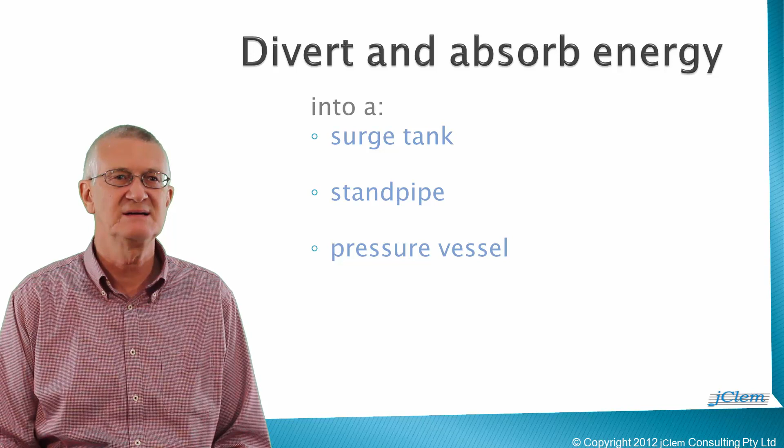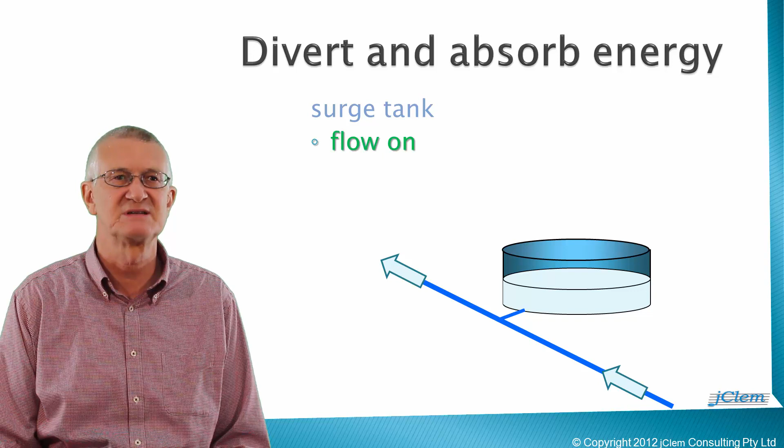pressure vessel. How does energy diversion work when using a surge tank? While the system is carrying flow, fluid level in the surge tank floats up and down depending on the hydraulic level in the pipe system. Somewhere downstream of the surge tank, a valve will close or a pump will stop. When that happens, the flow is diverted and stored temporarily in the surge tank.

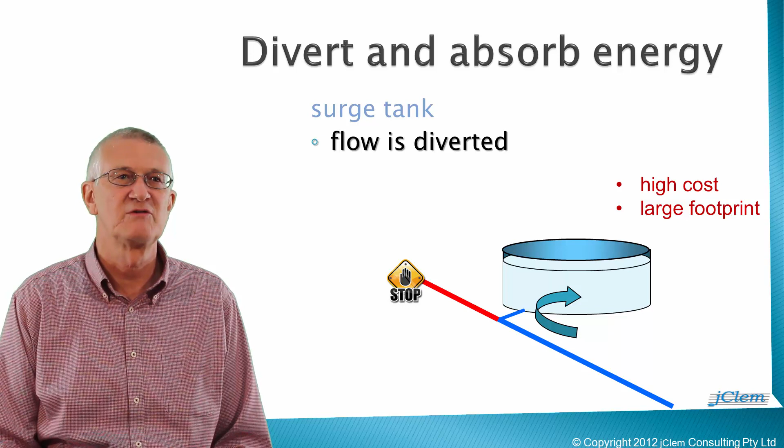Diverting flow into a low-height surge tank is often not practicable. For this solution to work, all the normal operating hydraulic grade lines throughout the life of the system need to fall within the height of the tank. During transient events, the system may need to provide overflow from the surge tank. Storage tanks tend to have a high capital cost, plus a relatively large footprint involving land requirements and visual social impacts.

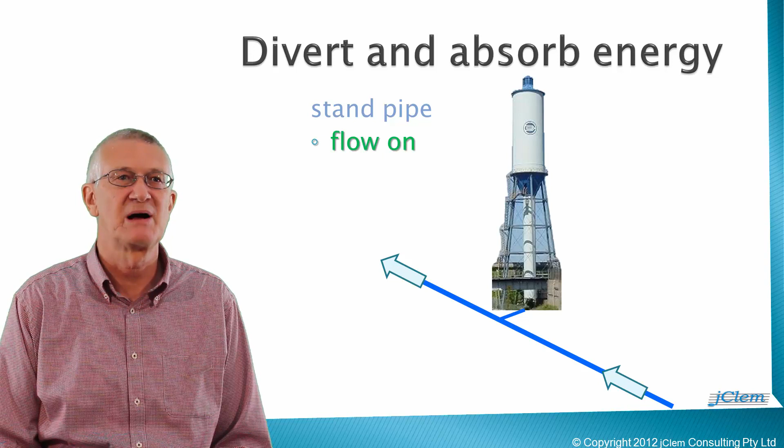Using standpipes as an alternative overcomes some of the problems found with surge tanks. How does energy diversion work when using a standpipe? While the system is carrying flow, fluid level in the standpipe floats up and down depending on the hydraulic level in the pipe system. Somewhere downstream, flow stops. Flow is diverted into the vertical standpipe and, if necessary, stored temporarily in a large component of the standpipe.

Diverting the flow into a small diameter standpipe can be more suitable for a few reasons. A standpipe can make use of the friction in small diameter piping to attenuate the surge, enlarge the structure towards the top to contain the fluid without overflow, economically build the structure to a greater height so that all normal operating hydraulic grade lines and surges are within the height of the standpipe. Some standpipes may still have to be designed to allow for overflow during transient events.

Unless a standpipe can be as simple as a self-supporting piece of vertical pipe, more complicated standpipes can have a high capital cost. One very significant disadvantage of standpipes is that they are not pleasing to the eye, so the public tends to say, "Not in my backyard, thank you."

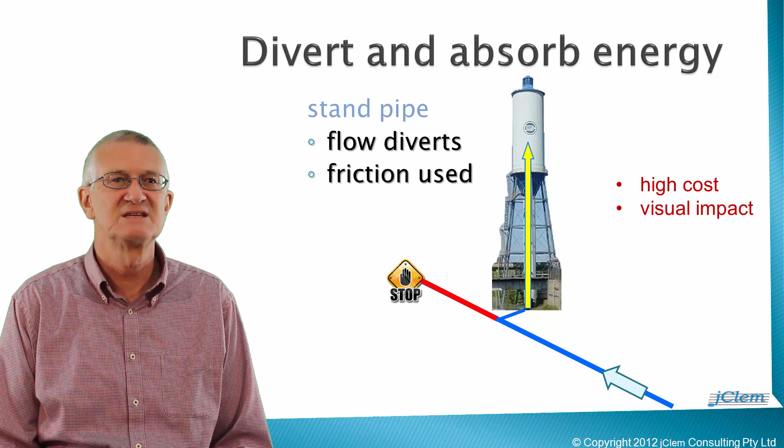The disadvantage of structures open to atmosphere, surge tanks and standpipes, has led to the popularity of closed, compressed air or nitrogen vessels. Pressure vessels are able to absorb kinetic energy in a compact, low-height format. How does energy diversion work when using a pressure vessel? While the system is carrying flow, fluid level plus gas volume in the pressure vessel adjusts to match the hydraulic level in the pipe system.

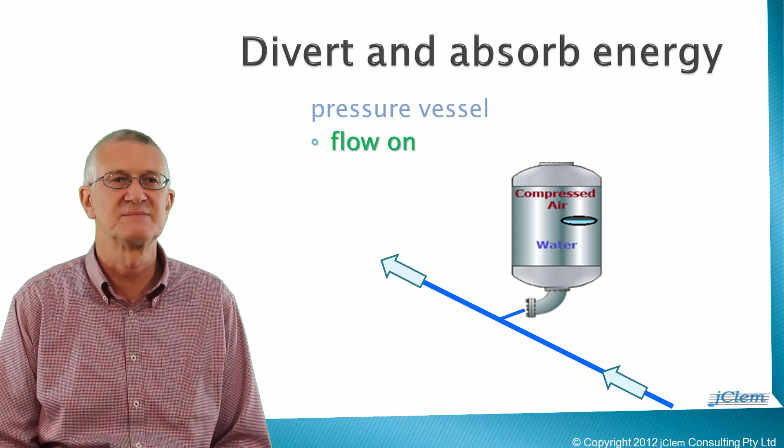Somewhere downstream, flow stops. Flow is diverted into the pressure vessel, gas volume decreases, and pressure of the gas volume increases. A significant proportion of the kinetic energy from the fluid is converted to energy stored in the compressed gas. In addition, flow rates out of the vessel into the pipeline can be throttled to constrain the rate at which energy stored in the compressed gas can be sent back into the pipeline.

A closed pressure vessel can't overflow. They can empty and discharge gas into the pipeline if vessel fluid capacity is too small. Despite this, relatively inexpensive pressure vessels can be designed with compact modular layouts. These advantages have led to them becoming widely used to the point where pressure vessels of various sizes and pressure ratings are commercially available as commodity items.

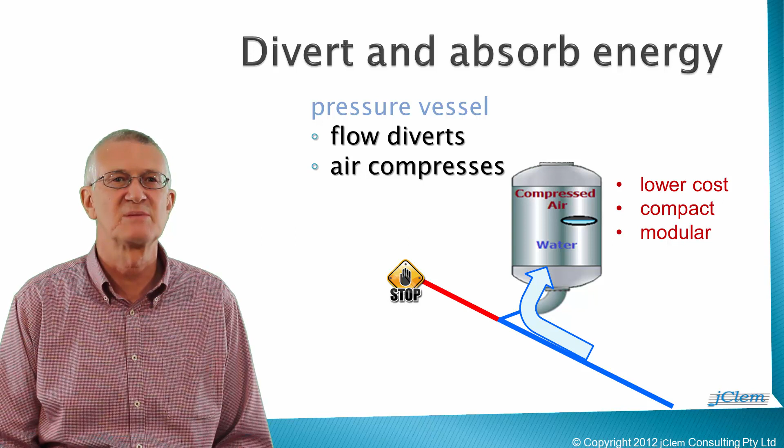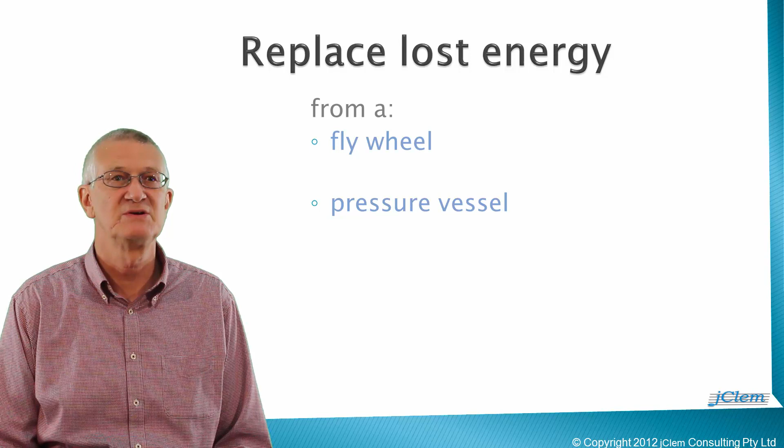For the delivery side of a pump station, we can replace energy lost when the pump motor stops by using either a pressure vessel or a flywheel. Flywheels, once brought up to the pump's normal speed, become a source of stored kinetic energy. When the motor stops for a period of time, the flywheel returns its kinetic energy into the fluid stream by keeping the pump turning.

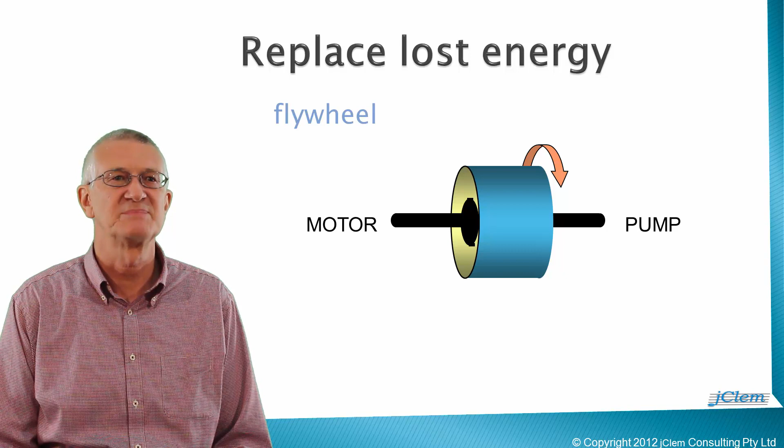Flywheels, however, create a number of problems, such as increased loads on the electrical pump starting equipment, increased mechanical bearing loads and pump maintenance, and occupational safety risks. Yes, you can put safety guards around a flywheel, but they can make that big red emergency stop button useless if they keep rotating for another 2 minutes, regardless of who and what has suffered an accident.

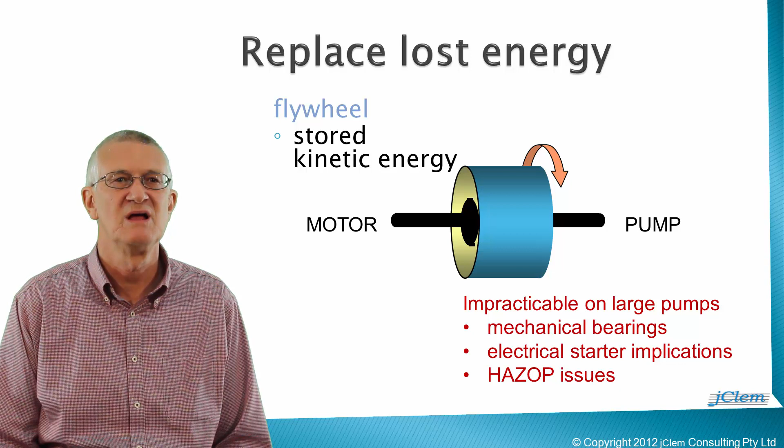Often at high rotating speeds, you can't design a flywheel with a big enough diameter without exceeding the safe rim velocity. Nobody wants pieces of disintegrated metal flying around a pump station. Providing the required moment of rotating inertia by making a flywheel longer increases the overall size and cost of the pump station. Consequently, flywheels tend to only be feasible on very small pumping installations.

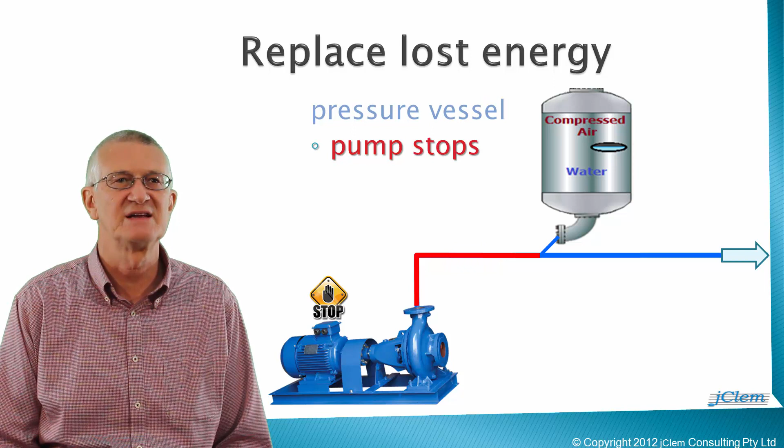As a result, compressed air or nitrogen pressure vessels have become widely used as a source of stored energy on the delivery side of pump stations, for all the same reasons of modular compact format and cost that make them popular when required to divert and absorb energy on a pump station suction main.

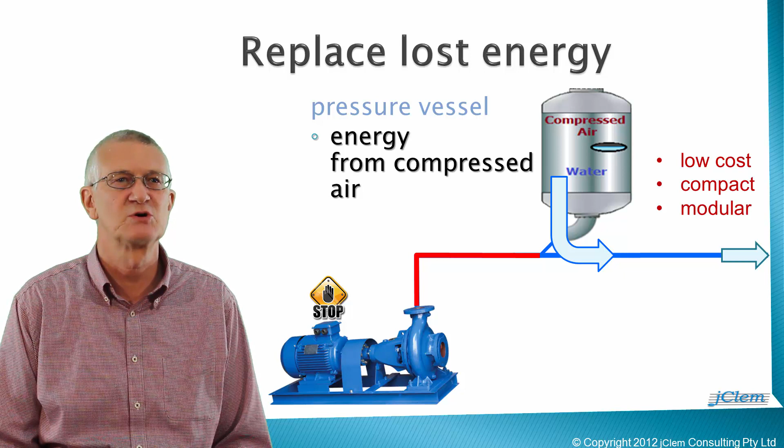What design choice can be used to directly reduce the size or rate of velocity change in a system? Start by selecting appropriate pipe diameters. Undersized pipes operating at high velocity dictate the magnitude of velocity change when a pump stops or valve closes. As the system grows, economics tend to favour increasing the system's flow rates. Consequently, the magnitude of velocity change tends to increase over time.

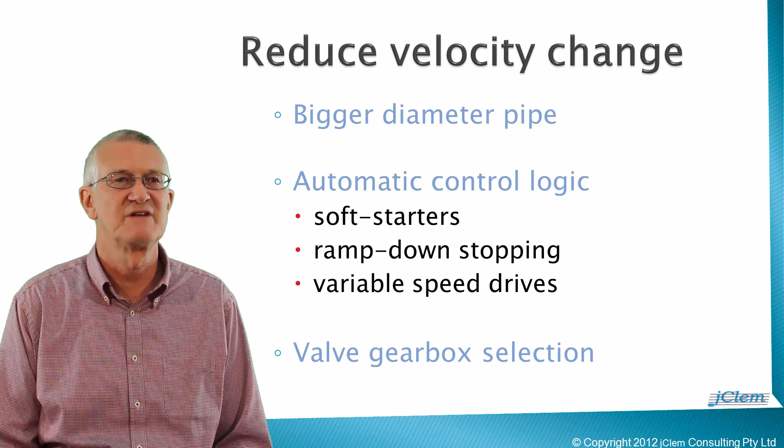Automatic control logic or manual operating procedures can be used to reduce the rate of velocity change by adjusting the time taken to stop-start a pump or open-close a valve. Pump speed control and rate of valve closure can be very effective during normal operation. Control logic cannot reduce the velocity change created by a power failure at a pump station. Often the pump power failure scenario is the one that governs surge protection design. We can protect a system against fast manual valve closure by installing a gearbox on the valve that physically forces the valve gate to close slowly.